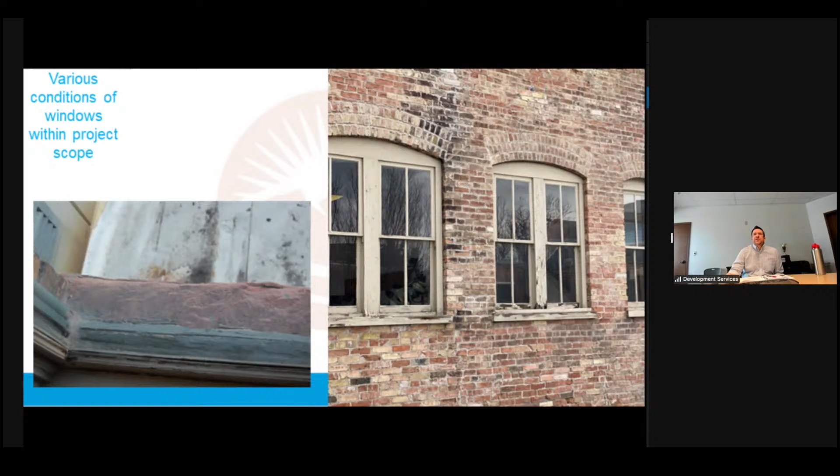Dustin, what's going on with that photo on the left there, what are we looking at? That's just looking down at one of the window sills. It's a sandstone sill that's kind of eroded over the years, and so that's what that one is. Okay, got it. I didn't realize we were looking... I thought I was trying to - that makes sense. Okay, thanks.

And so the applicant wanted to be able to come to Landmarks Commission and kind of get some perspective and some guidance moving forward. And so we brought it to you to kind of go over this. But as I've kind of shown here, there's multiple buildings that each have their own styles, and each of those is in various conditions as far as how well they've been maintained or not over the years. So it would be helpful for the commission to help direct the applicant. And based on how many windows there are, it'd be one thing if we're looking at one building, but since we're looking at multiple ones, it gets a little more complicated.

They've done a pretty good job of going back and doing an analysis on each of those windows, and that's helpful. They've gone back through and looked at some of the plans from the 70s, 80s, 90s, and provided some of that, which I included in the staff report for you to look through. It would probably be helpful to take a look at those plans to see where those snippets fit better. At least that's how I felt going through that.

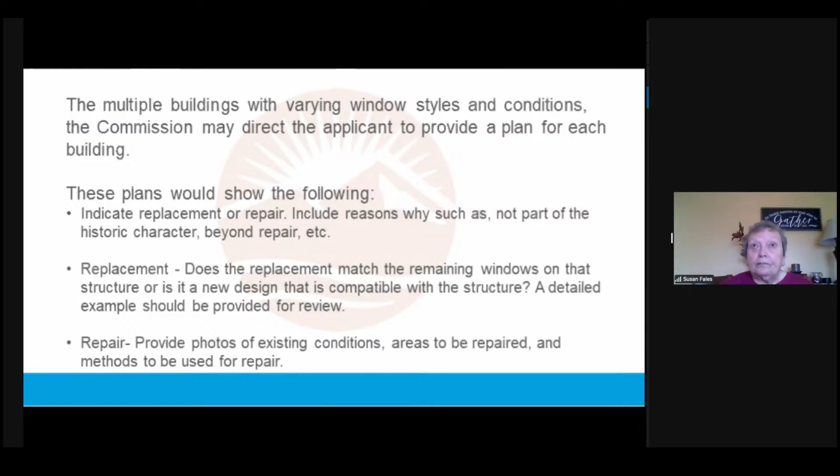And then the ground floor would be centered on retail and restaurant type spaces. There's a quiet old space that's been office facing the courtyard that right now they're talking to a tenant that would have yoga classes and an entrance off of the courtyard, which would then tie in with an entrance in the building. So we see more of those types of activities and uses on the ground floor. Food is one of the main things they're looking at right now, improving food options especially during lunchtime. There's already some great restaurants here, so just building off of that is kind of the focus.

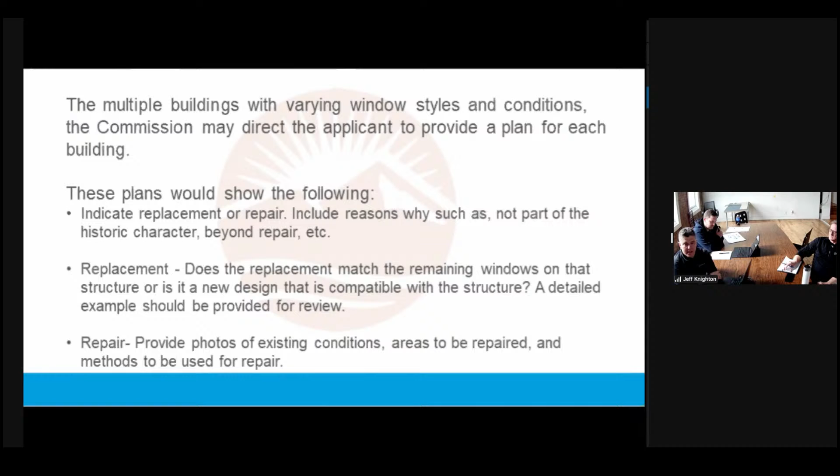Jeff, is that what you're looking for? Yeah, that was helpful. Now let me jump back to Dustin quickly.

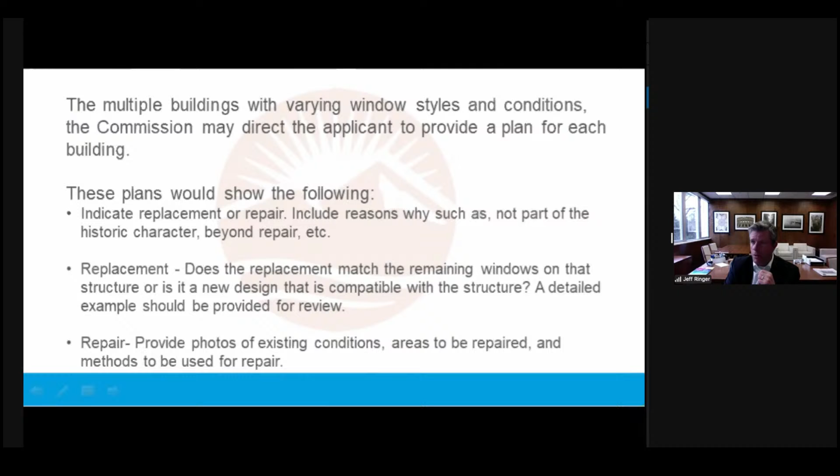Dustin, when they're speaking about replacement of windows, especially in the newer additions, so our roughly under 50-year mark, does the city have any concern about just straight up replacement on any of those windows? Or would you prefer repair on some of those windows as well?

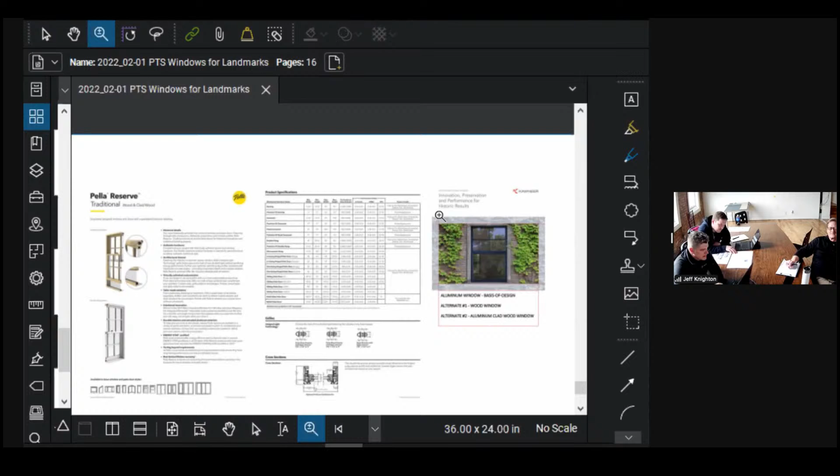Yeah, that's one of them. There's the Pella Reserve. There's another one that our contractors told us we can get more quickly with lead times, made by Windsor, but it's the same type of thing. It's their traditional looking double hung window. Most of the windows are double hung, so that's what we'd want to replace it with - a double hung, as much the same visual look as what is there.

Okay, thank you. But to your point, that is correct - what we would prefer is just the consistency. We can go through building to building, and they have different sizes, right, the proportions change on the facade. So there will be that variation, because we're clearly not going to change the opening size. We just want to build the same opening with a new window, so I think that'll help still maintain some of that variation from the facades. But that is kind of what we're proposing.

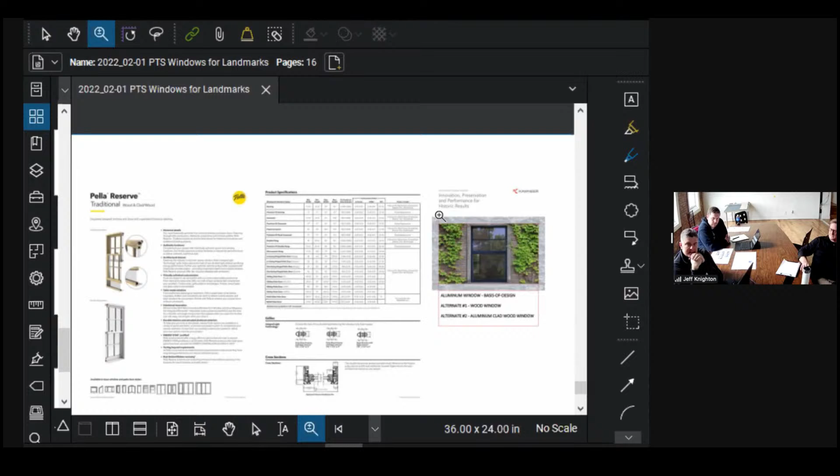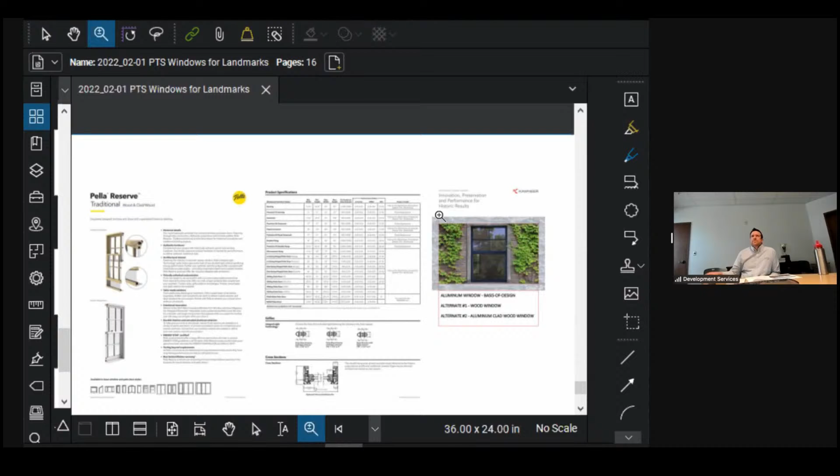Okay, thank you. One more question, please. When I'm up on the second floor where there's all those offices, where are they on one of those plans that you have there? You understand my question? Yeah, I think so. You wander through all these little offices, and then you have to push a button to go down some stairs.

Yeah, I don't know if I can. Let me see if I can. No, this doesn't have the option where I can draw on the screen. Trying to see how I can point that out for you.

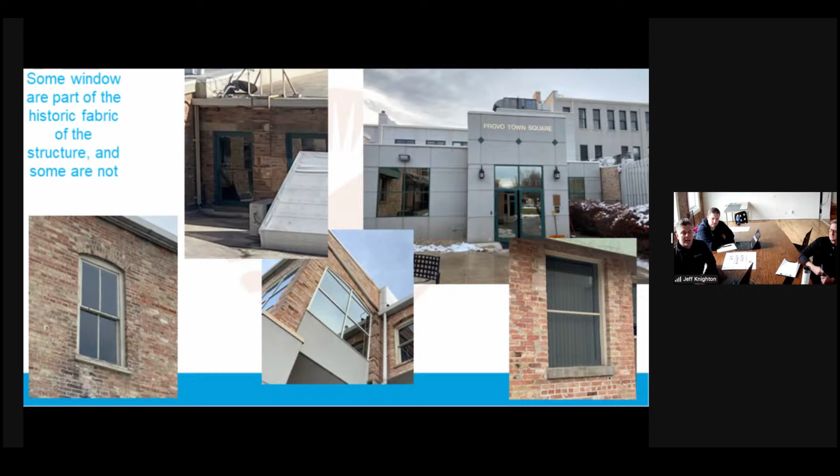And so that's exactly our goal, is to do things that are complementary, that do not overshadow, do not overcompete with the historic bones, but that fit in nicely and cleanly, in an elegant way. That's awesome, thank you.

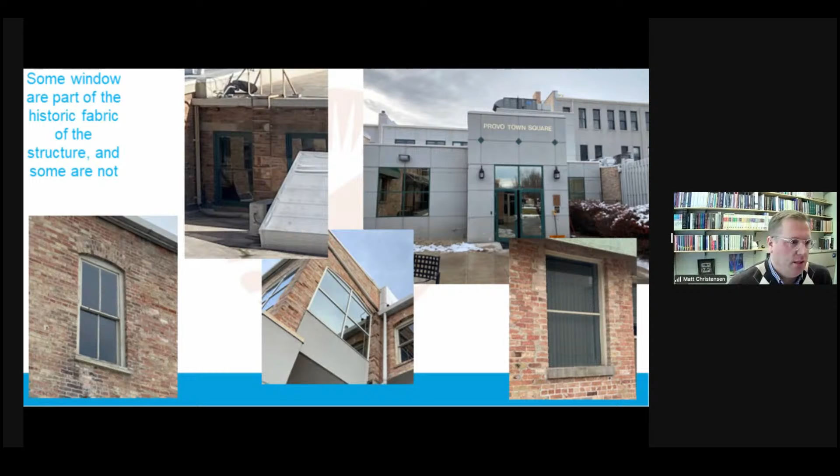Dustin, how much of a difference do you think the windows would be if they took it on a building by building basis? Do you see a substantial difference in your mind of what they would look like? Or are you hoping to have a drill down of what windows can actually be preserved versus which ones need to be replaced? Yeah, so I tried to put up images of different windows here to help answer that type of question that I thought would come up.

Currently on all these different buildings, each building has different windows. As you can see, there's ones with an arch over the top, there's ones with sandstone sills versus a wood sill versus—this one's a newer addition—concrete. There's all different types on these buildings, and some are obviously not in the scope, that's a separate topic, but the ones that are, they're clearly different types of windows, wood windows, but there's different types of materials used on those windows.

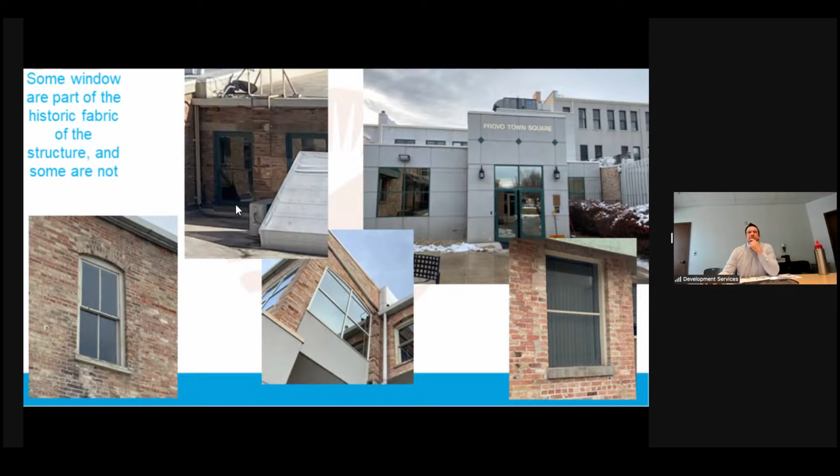So to take them all out and replace them with a new window that kind of fits, I don't think would be appropriate, because we're dealing with different buildings built at different times, and we're looking at the back of the building. Imagine if we went and did that on the front of all these buildings, how much that would change the original integrity of that.

So that's why I felt like looking at each building and saying, okay, for example, on this one here, this window doesn't fit, but these need repairs. Some down here need more repairs than others, just because of maybe sprinklers and lack of maintenance over the years. So some of the window sills are pretty rotted, and those sills could be replaced, and maybe some other portions of the window could be repaired. But on the rest of the window, it just needs some new paint and possibly some filler and things like that.

So there's a preservation brief that the Department of the Interior has created specifically for the repair of historic wooden windows, called Preservation Briefs. I sent a copy of that to the applicant, but I think there's a lot of good information in there that helps answer a lot of these questions, as far as it talks about respecting the significance of the original materials and features, repairing and retaining them whenever possible, and when necessary, replacing them in kind.

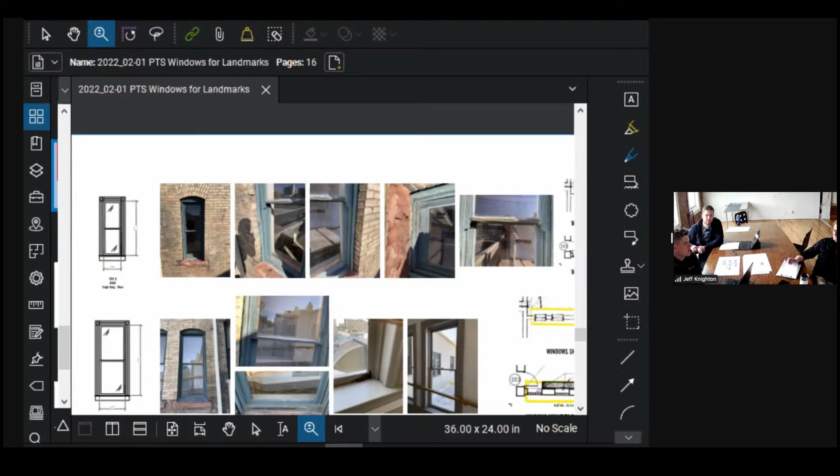So are we talking like a lot more detail than we have in those drawings, maybe something more rendered, or do you feel like seeing them rendered in place is what we're looking for.

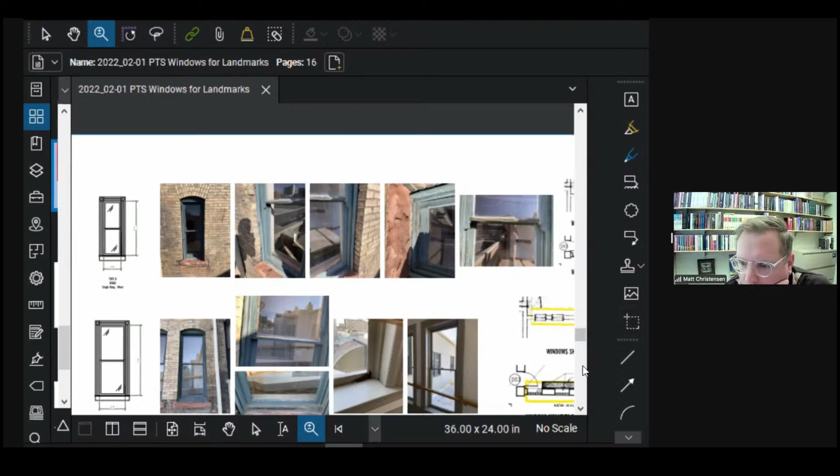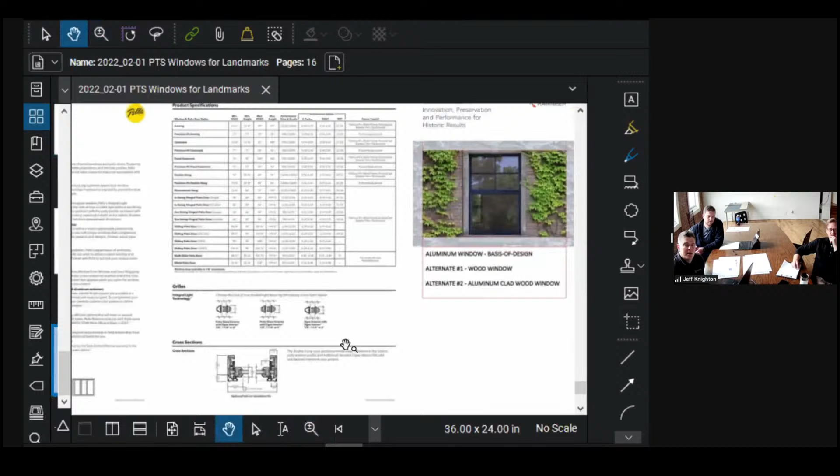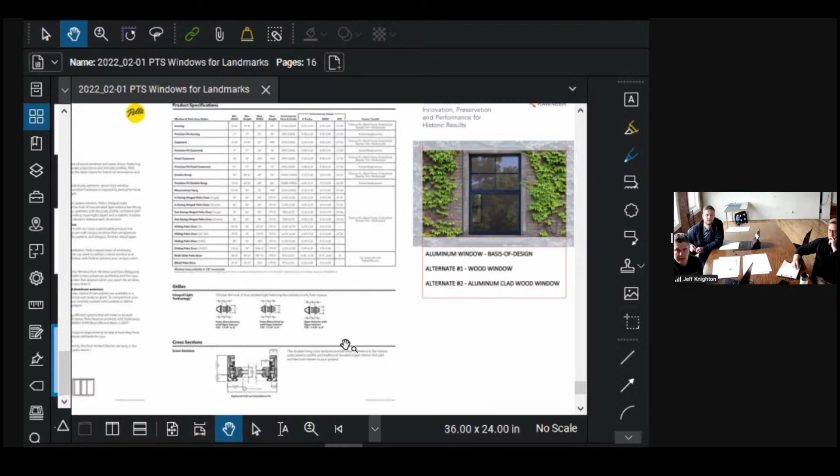Yeah, that one. So that one over there on the right is the Kawneer - that's if it was just all aluminum. The Pella is the one that would be aluminum clad, with wood on the inside, and they just have the aluminum cladding to protect the wood on the exterior side of the window. So it's Pella over on the left of that little image right there.

And so the profile of the frame and everything is the same whether it's clad or exposed wood. We prefer the clad for the durability of it, but it would have the same profile.

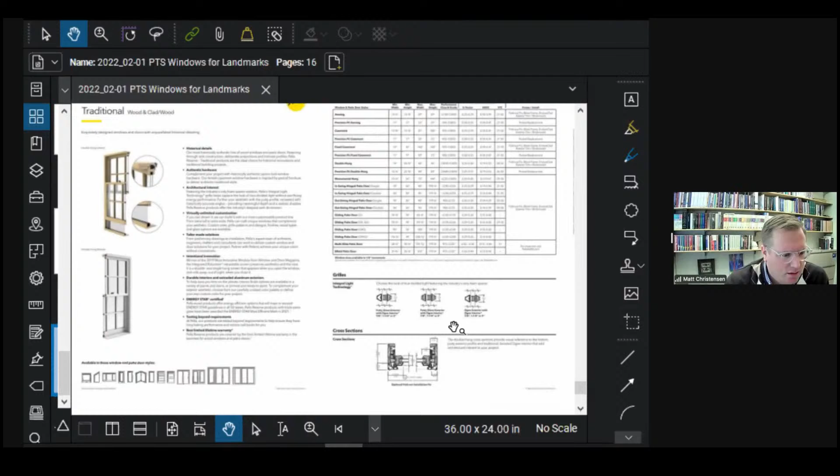30 seconds. Dustin, looks like Jasa had to bail and Jeff had to leave. With just Susan and I, I don't know that we can actually make any votes now. Is that accurate? You have Jesse here as well. Oh, Jesse, because she's off camera. I'm not used to you being there, Jesse. I'm sorry, I've been talking. Well, I should have known better. You're right. No public comments. Out of sight, out of mind is my problem.

Thank you. Okay, so commissioners, what do we want to do? I would recommend that if we can possibly get together in 2 weeks, that we do so to try and resolve this, if everything would be ready for us to look at before that. I think there's a lot more things that they gave us that we haven't been considering.

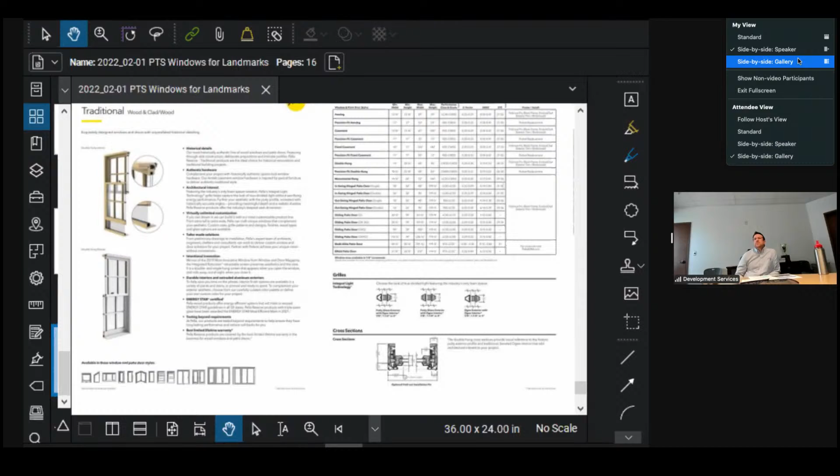What do you mean? Those pictures they showed - were they just talking about the glass part of the windows? I'm not sure that I have a good sense of what they're doing. That's just what I thought. You said you have a good sense of what they're doing? Yeah. So you feel like with the information we have, we could actually make a decision? Yes. Okay, but I may be the lone wolf. No, I'm just making sure I understand where you're going.

Susan, what about you? Well, I must confess, with all of the things attached, until we were meeting now I didn't understand what I was looking at. There was so much information there, and I'm just beginning to get a feel for it. I like the idea of what the applicant is proposing in terms of the wood-clad windows and the variations in sizes - retaining the historic look, the eyebrow, things like that. In that sense, I'm quite comfortable with what they're proposing, and comfortable with the idea of replacement versus repair at this point. So maybe Jesse's right, maybe we could make a decision. I guess we know what Jeff's feelings were about it. Are you on mute? Then I agreed with what Jeff had said, so.

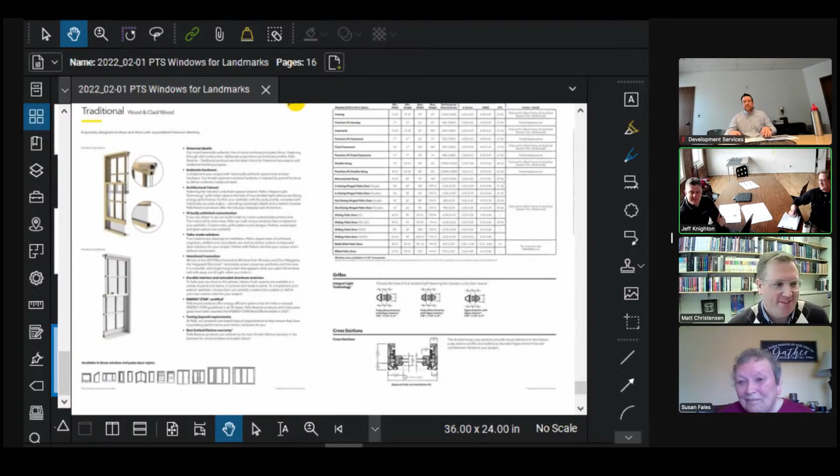Dustin, we need to, I know it wasn't on the agenda, but we need to firm up when and where we're going to have our tour for the historic home tour this summer. The Freedom Festival, we've already had one meeting. We met last week, I think it was last week or two weeks ago.

Can we put that on the agenda for the March meeting? We need to not only pick a place, but pick a neighborhood, and we need to start deciding if we're going to ask homes to let us in, or if because of COVID we're not going to do that. We need to decide how we're going to handle this year's historic home tours. Okay, yeah, I'll add that for March.

Thank you. There's a discussion, right? Yeah, that's right. Okay, Susan, do you have anything?

No, in fact that was the very issue that had occurred to me that we hadn't really talked about, and it's getting really late in the year to start determining the neighborhood and getting homes, and I'm really concerned still about COVID. Yeah, I am too—people inviting crowds into their homes worries me quite a bit.

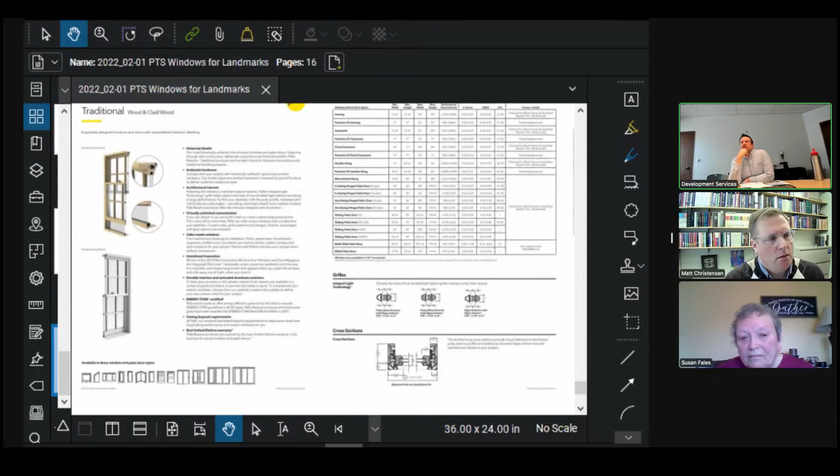I was wondering—I can't remember what it was—Matt on the tour, yeah, last year's. Maybe we can talk about this next month. I was just wondering how last year we put together that walking tour brochure—did that work? Is that what we need to do this year?

Yeah, I think it worked well last year. I don't know how many people actually went and did it, but I think the fact that we're putting something out there is the best we can do, and I thought it looked great. If needs be, we can talk about it more next month, but maybe do a different section the same way—pick a neighborhood, yeah.

There is a request from the church on University and 200—I can't remember the one doing all the renovation—Community Church. They've actually asked to be on the tour this year, or to be a sponsor of the tour in some way, so there's something to think about there too.

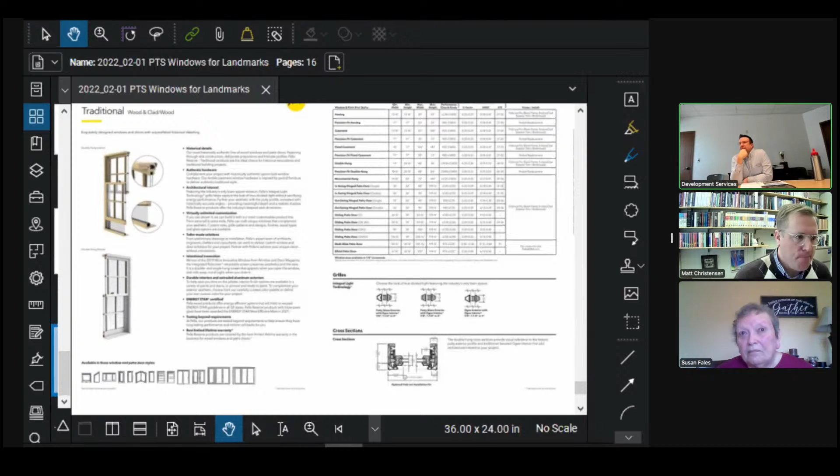Were we working on that historical booklet? We worked on the history and what houses were going to be listed there. Where's that project at? It's on hold. We got going on it, and there was quite a bit to do on my end, and our graphic designer was wanting to put a lot of effort and time into that, but he's not here anymore. It's still something I want us to do, but I've had a lot of other stuff and haven't been able to dedicate the time to it, but it's on my list.

When the GIS person came to the meeting I went to—Provology, I think they call it—they asked if there was something about historic districts. Fortunately, I was there and could say there is the Landmarks Commission and we do have this online, but the GIS guys seemed to have no idea what was on it.

Maybe we can bring it up as a discussion item for the next meeting, Dustin, because I'm guessing we can lend a hand in that area. I know I certainly can—I'm not a graphic designer, but I know my way around InDesign, Illustrator, and Photoshop.

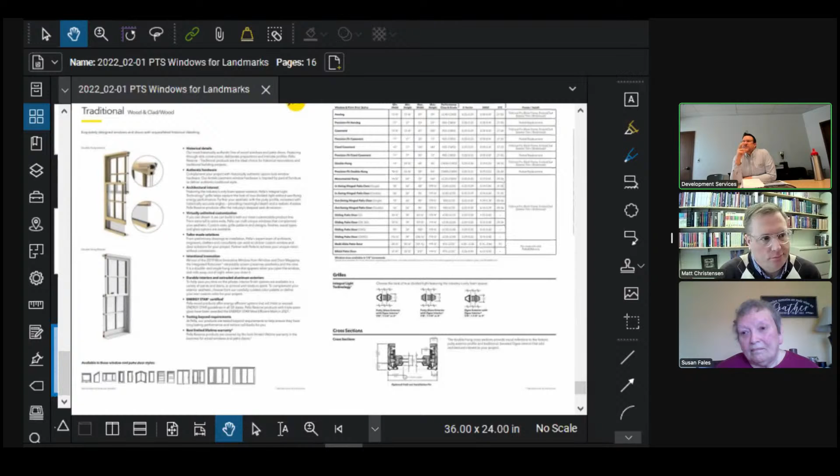I think one portion of it was just trying to coordinate it all and decide what other houses we might want to add to the homes and all that. We've all kind of done an exercise going out and looking at some.

So let's just discuss it, and maybe we can all get up to speed on where we're at and see what we need to do next. Okay, anything else, anybody?